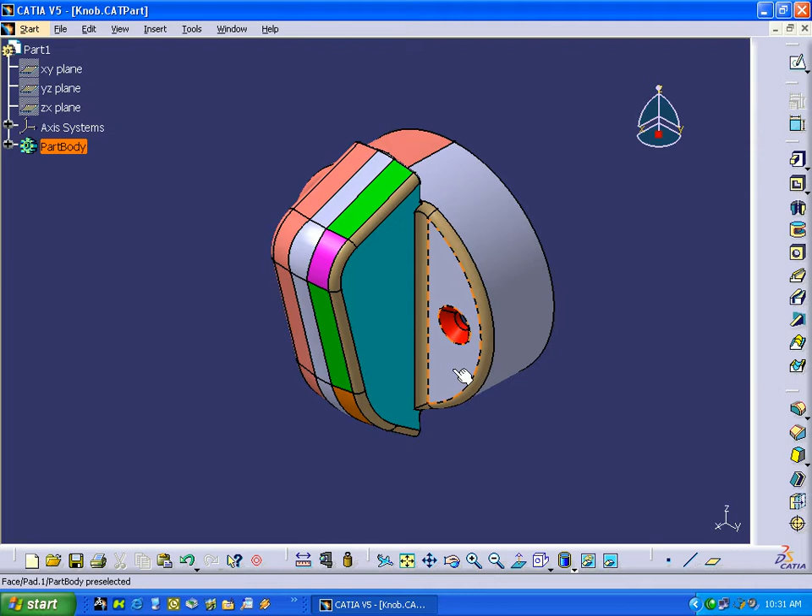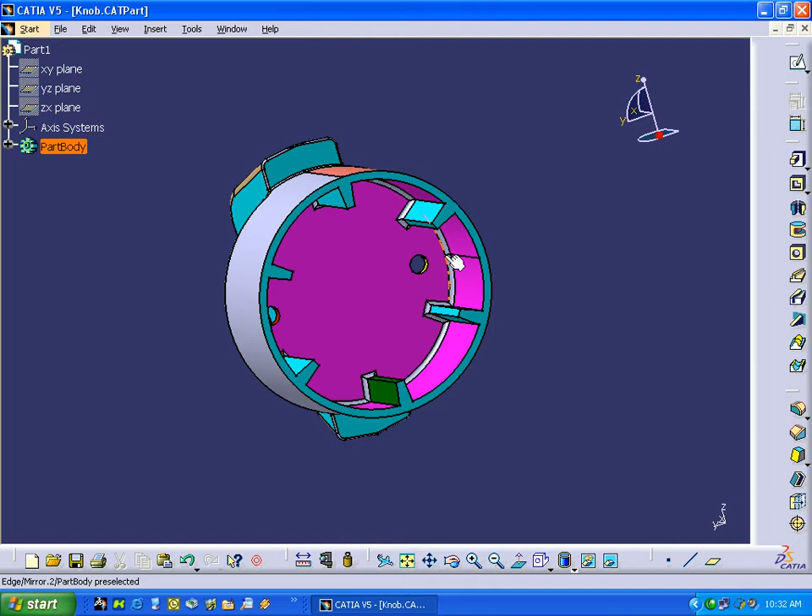I'm in the CATIA V5 application, and I want to show you what we're going to make today. We're going to make this little plastic injected knob with some ribs on this inside part. What we'll do is make this little rib first, and then do a circular pattern to rotate that feature around our center axis vector.

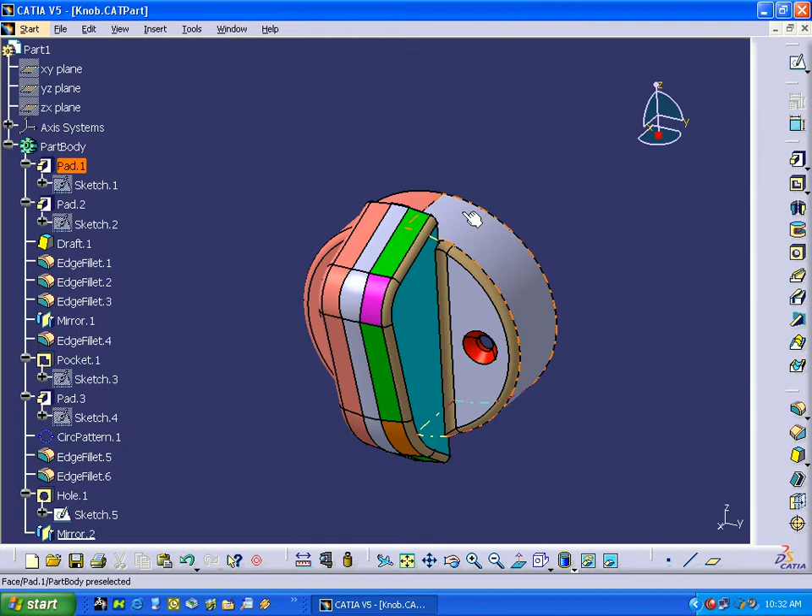I want to talk a little bit about the design intent of how I'll make this, and I'll step you through the steps so you'll see how I make this actual part. So we've got the tree over here, and this pad right here is the pad that we'll make first.

The second pad is this pad, and then we'll create a draft angle of 7 degrees to get a little draft going on there, and then we'll create some fillets, and then we'll come back in the back.

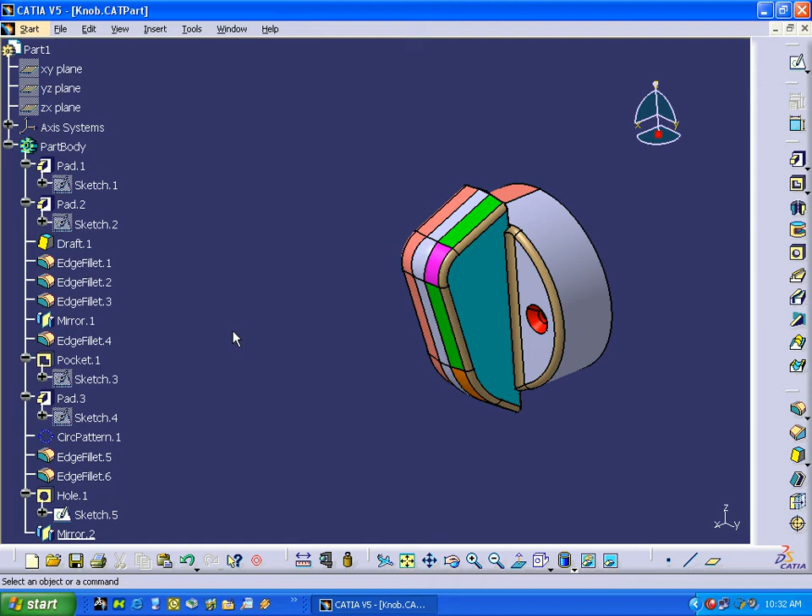Before we do that, we'll do a mirror of this thing, and the idea here is we'll only create half of the part, then mirror the other half over, and we'll create some little edge fillets on this edge up in here and over in here at one time.

Then we'll create a little pocket here, which we'll do as a subtraction of material, and then we'll create this little pad here, and then we'll do a circular pattern, and create a little edge fillet, some edge fillets.

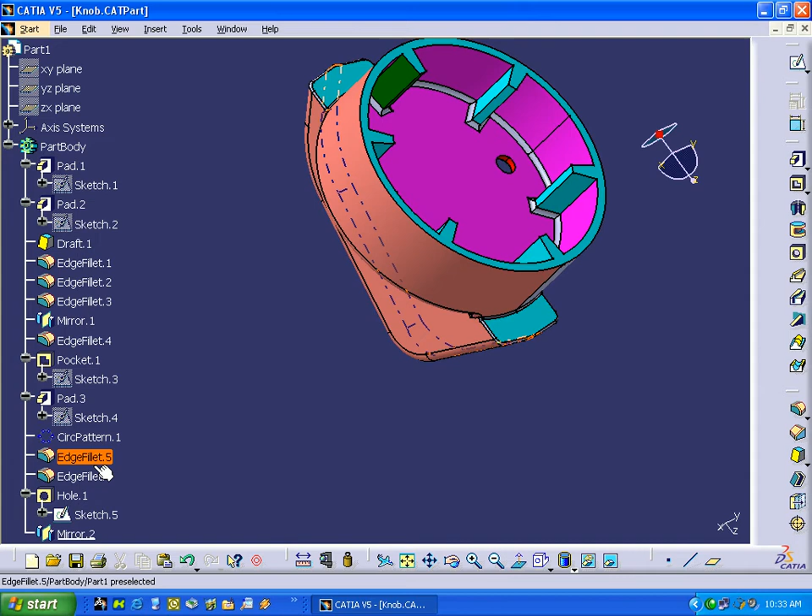On this feature down in here, we'll create a little edge fillet down in here, and then we're going to create a little hole here, and then we'll mirror that hole over to the other side. That'll be the basic steps of what we're going to do to create this little part.

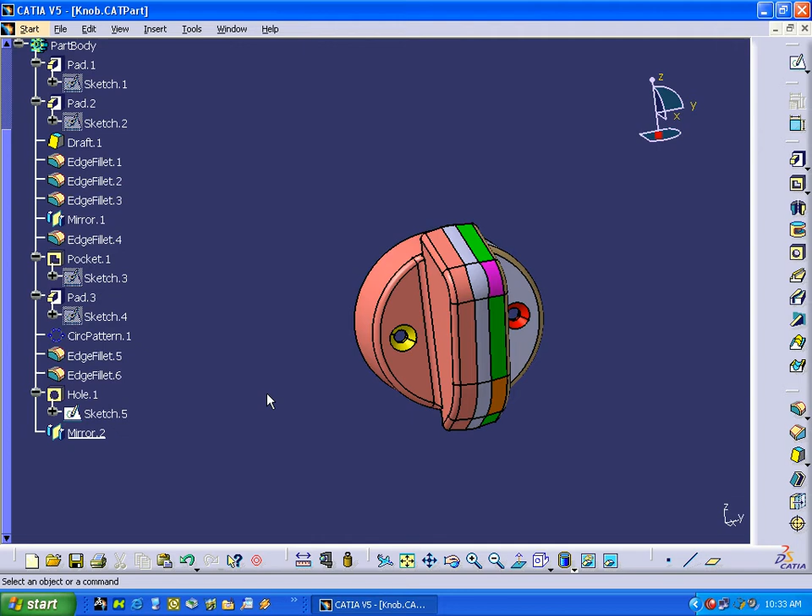So what I'll do now is open up a brand new part file, and I'll show you how I make this part from scratch. I go to Start, New Part, hit OK, and I'll type in New Knob here. Hit OK, and a brand new part pops up.

What we'll do here is no-show these planes because for me it's just busy information, and focus on the orientation. This is our orientation axis, and this axis resides at the intersection of all these planes. For example, we're going to start working on the YZ plane, which is this plane right here.

So if I want to, I can just no-show these, and for me it makes it less busy. Again, start on the YZ plane, and we'll create a sketch. I'll select it, create the sketch icon in the toolbar, and now we're ready to start sketching.

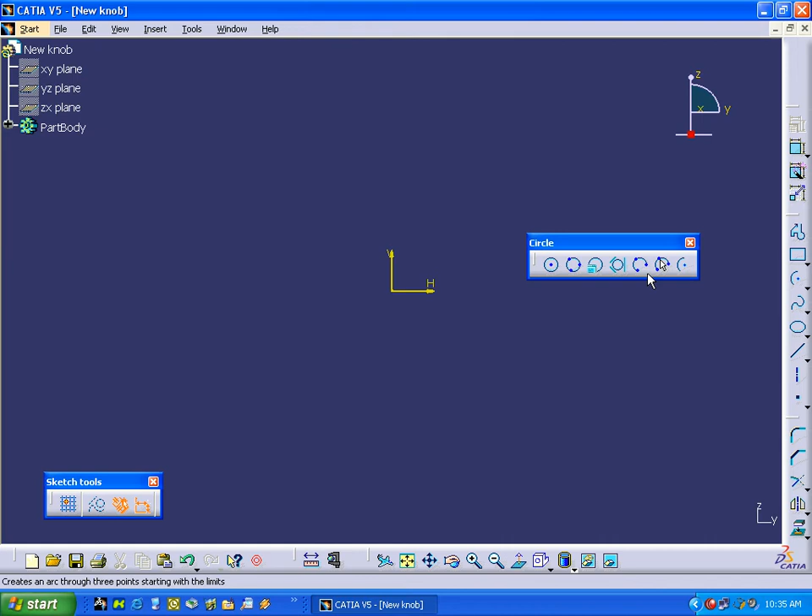So we'll start in this circle toolbar here, and start this thing as an arc. We'll select this, come up here, and create just a half arc here, and hit there. I can minimize this also.

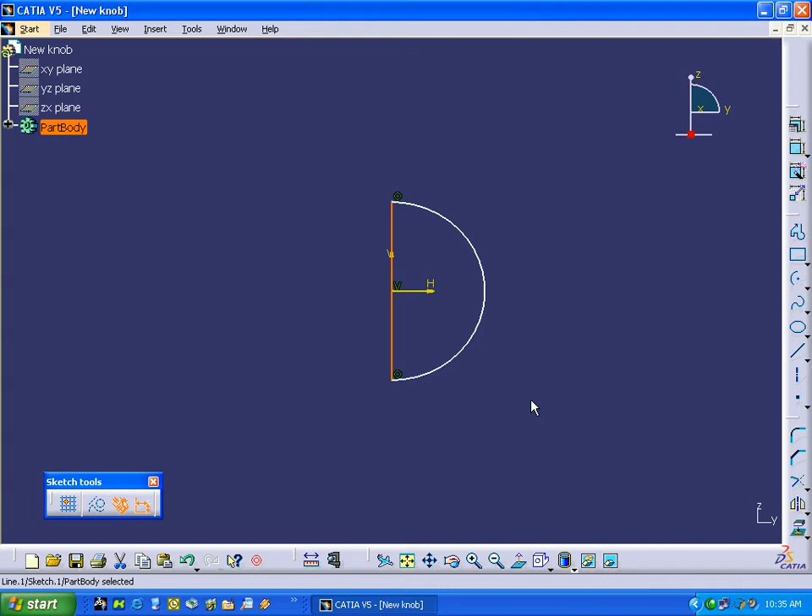Now I'll create a line that will connect the arc ends, and I'll dimension it at 15 millimeters. We'll kind of slide that in, and reframe down here a little bit.

Okay, so now what I've done is I've created a sketch. When the sketch entities are green, that means it's totally defined, and I can exit the sketch and start building a feature here.

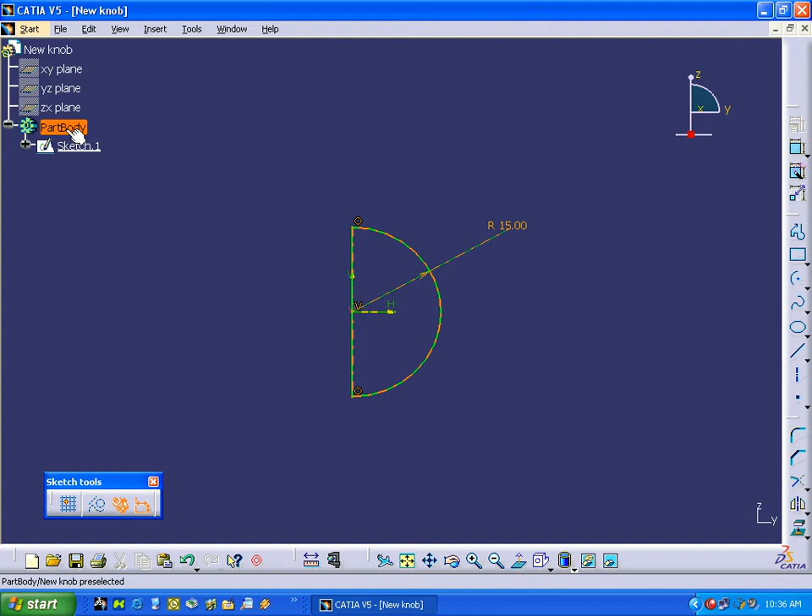There are two ways to exit the sketch. I can exit with the workbench toolbar's exit workbench sketch, or I can just double click on the part body, which also exits the sketch. To minimize the amount of toolbars, I like to just minimize that toolbar and double click on part body. So now we'll use this function and create a pad.

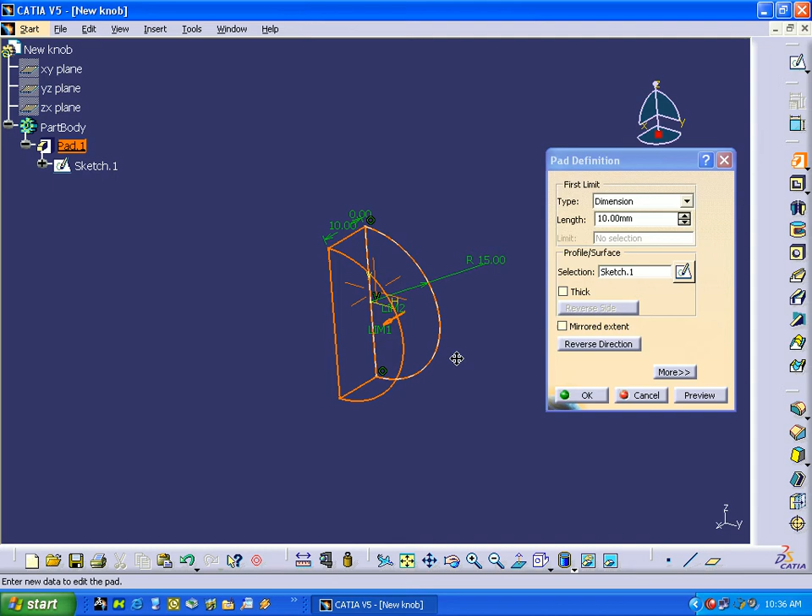I'll select the pad, and we'll create a dimension of 10 millimeters, and we'll select the sketch. Now we're about ready to start building the sketch, and I can hit OK, and we've now built the first solid feature in this part.

So now what we can do is we can create another sketch, and we can continue building. So I'll select this face, and I'll create another sketch.

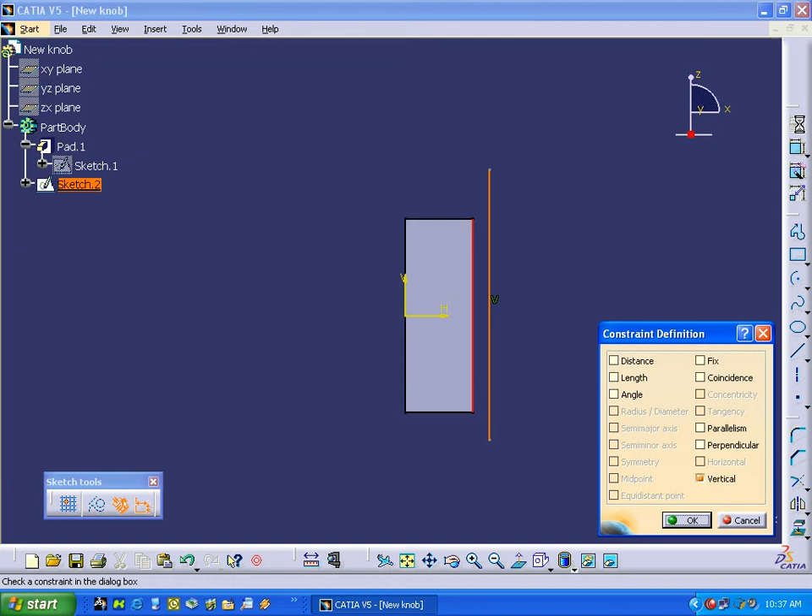How I like to do it is I like to create a line here, which will be vertical, and I'll highlight this and control this, and add a constraint, which is coincidence with there. Now this little toolbar here will give me a normal view, so I can rotate it around if I like, and you can kind of see where I'm working. It's on the back side there, and I can hit this again to get it normal.

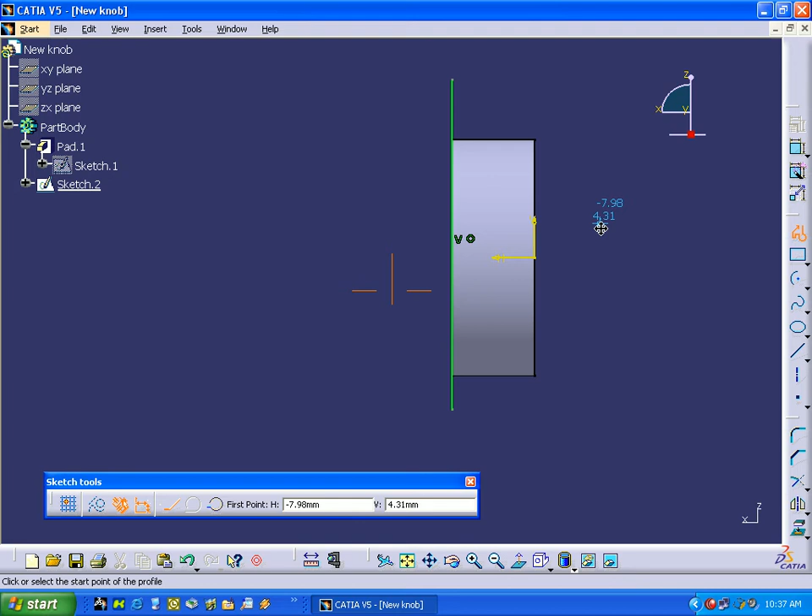So I'll go into this function, which is the profile function. I'll double click it, and I'll zoom that up a little bit, and I'll start building my sketch. I can exit out of that.

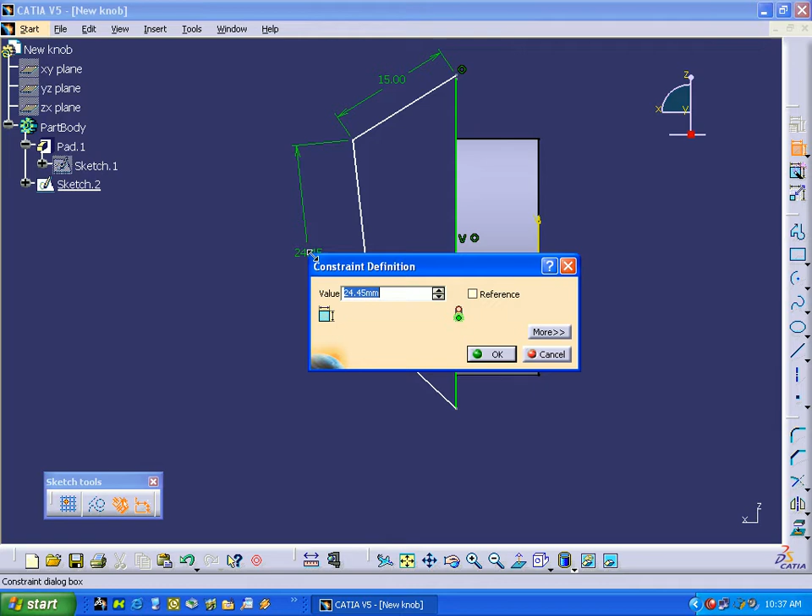Now I can double click on the constraint toolbar, and I can start dimensioning this sketch. We'll dimension that as 15. We'll dimension this as 25. We'll dimension this as 10.

We'll also add dimensions from the axis of 18. Another dimension of 18 here. We're getting close to getting this part totally defined.

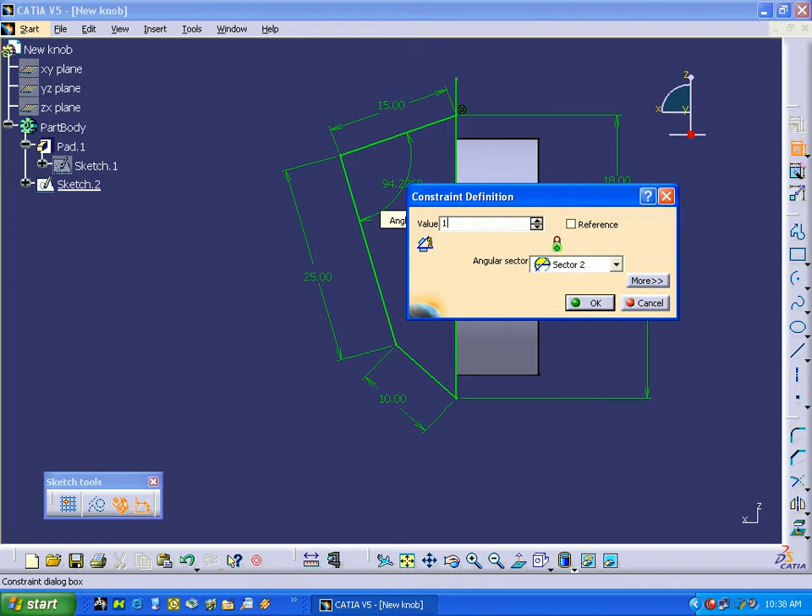As you can see, it's still white, so it needs more dimensions. We can try to add an angular dimension here and see if we get green. We do. So green again means the sketch is totally constrained, and you can kind of see where we're sketching here. It's on this plane right in here.

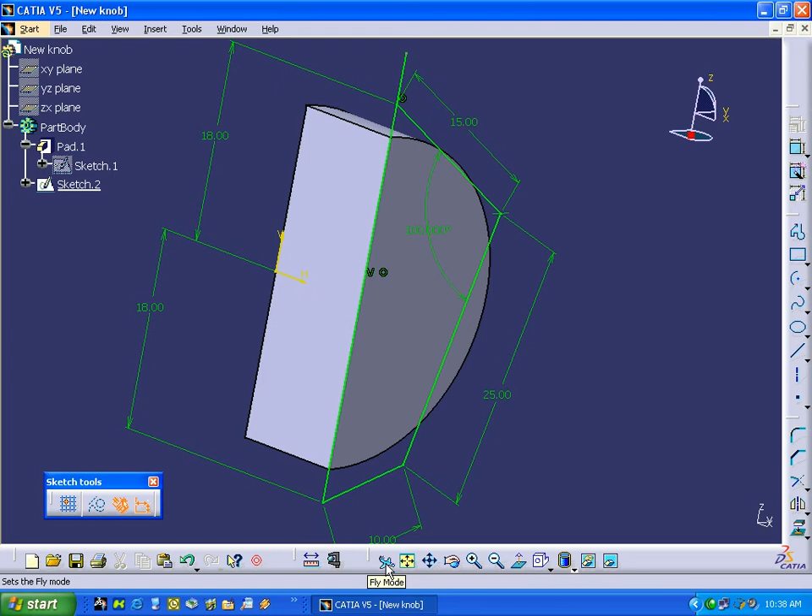And so now we can exit out of our constraint. We can double click on part design, and we've created another sketch to drive a feature. And this is the sketch right here we just created.

Ooh, it looks like we've got a little extension line here, so I can go back in and clean that up. Okay, we'll go back into the sketch, and incidentally, if you want to check and see if a sketch is ready to drive a feature, you can go to Tools, Sketch Analysis, and it says it's opened, and that gives you a warning. So it's telling you that it's not going to drive a feature until this is closed.

So we can close this here, and we can go down into our Trim toolbar, and we can select that. We can select this. It's giving us a little error message, so we can try to delete a dimension and go back and do a trim function.

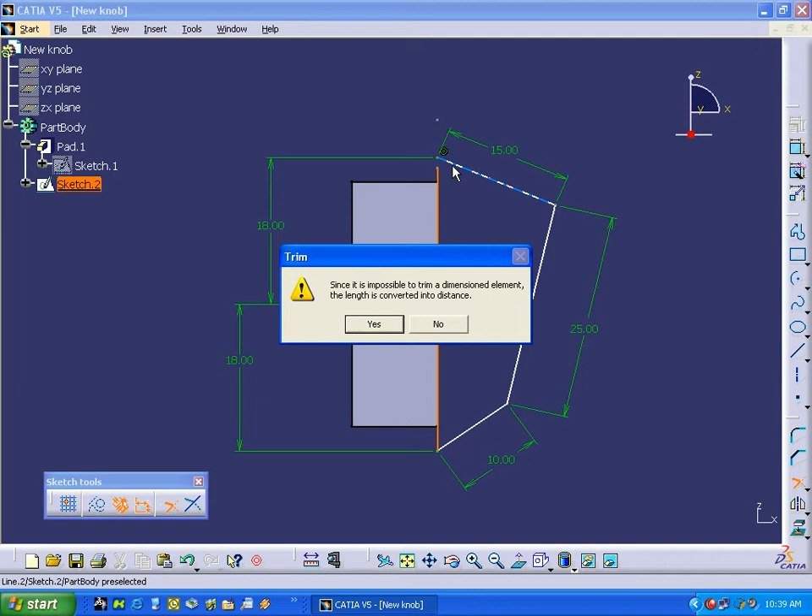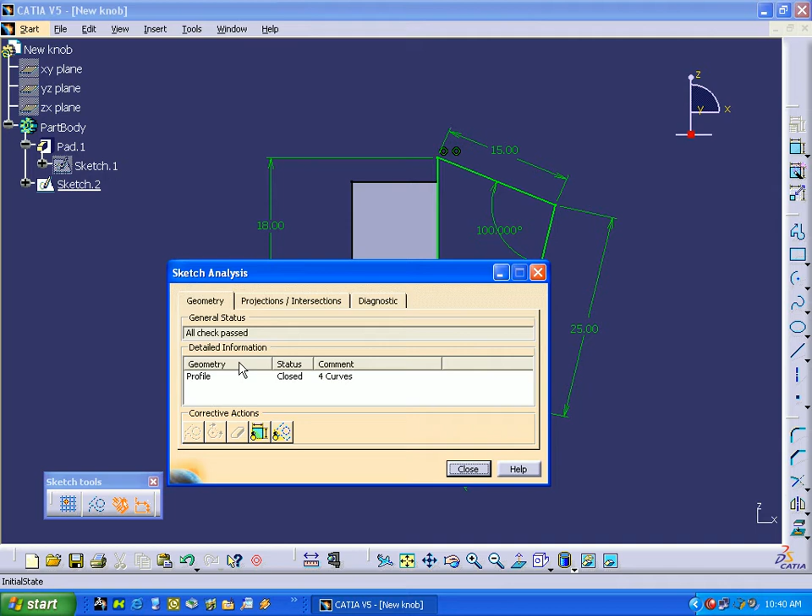Now let's see if this thing is totally closed. So we're going to go to Sketch Analysis, and it is closed, so it will drive a feature. So we can go back to isometric.

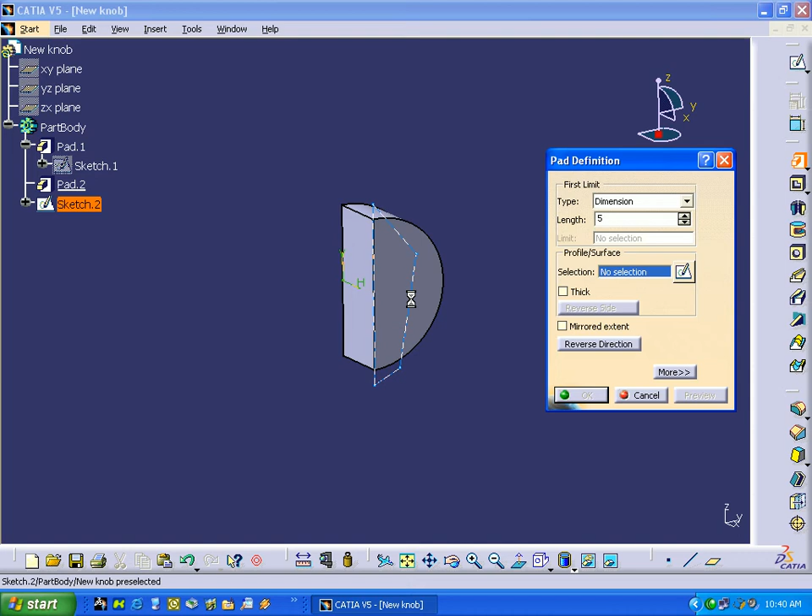We can double click on part design, and we can build this feature. Pad it. We'll go over 5. We'll select the profile. And in this case, we need to reverse the direction because it's going in the wrong direction that we want to go. We can hit OK, and we've just built that feature in the tree.

If you like, we can go back and color these features so you can kind of identify them with a color. Hit OK. So the orange color represents this pad here.

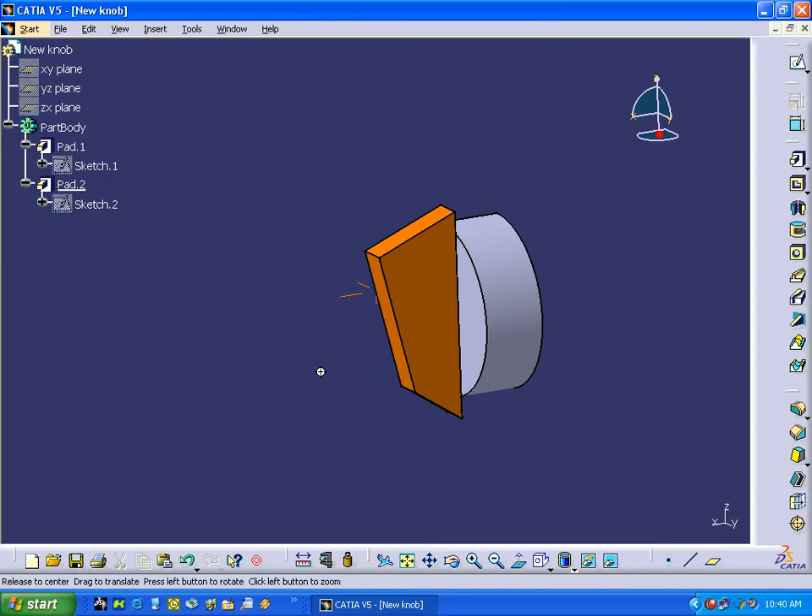Now what we're going to do is we're going to create, like I said, the draft function. We're going to use the draft function to draft this surface, and this surface. Actually, those faces. So what we'll do is we'll go down here into the draft function, and it's asking for an angle. We'll type in 7 degrees, and the faces to draft.

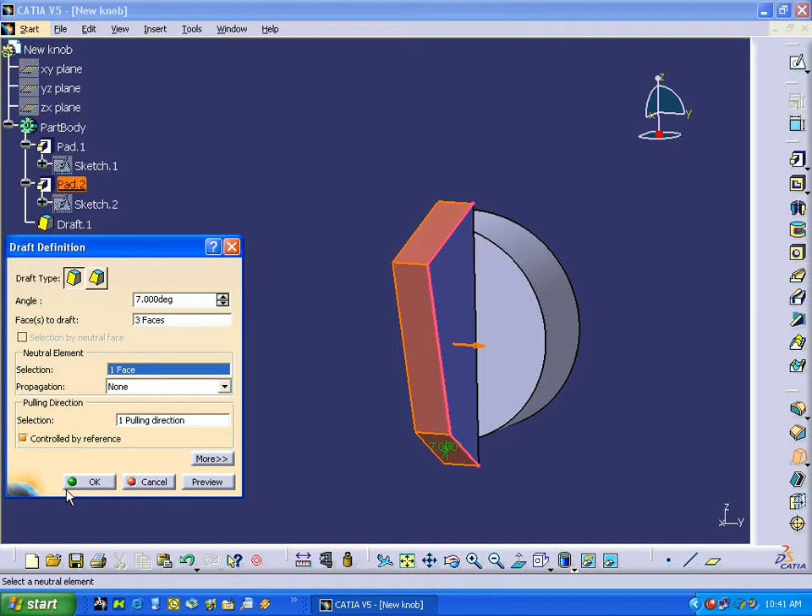We'll select the faces, and then it's going to ask for a neutral element, and everything looks okay, 7 degrees. We'll see if it'll drive it, and it did. Now what we can do is we can go over here and we can see if it is in fact drafted, and there is. It does look like there is about a 7-degree angle on there.

Again, if you like to add color to that draft, you can go into Properties, and you can color that draft.

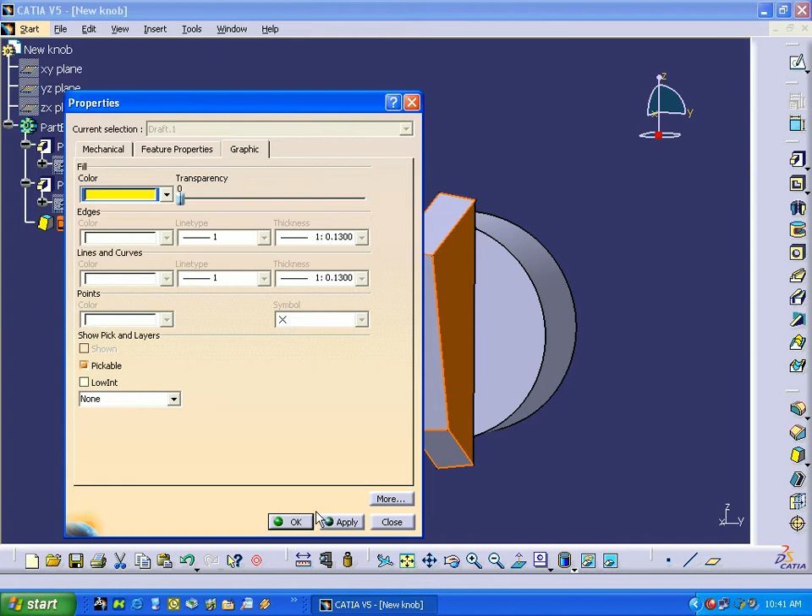Also, you can color things by right-clicking over here and going to Graphics Properties, selecting the item, and coloring it with Graphics Properties. Usually in these applications there's more than one way to do things.

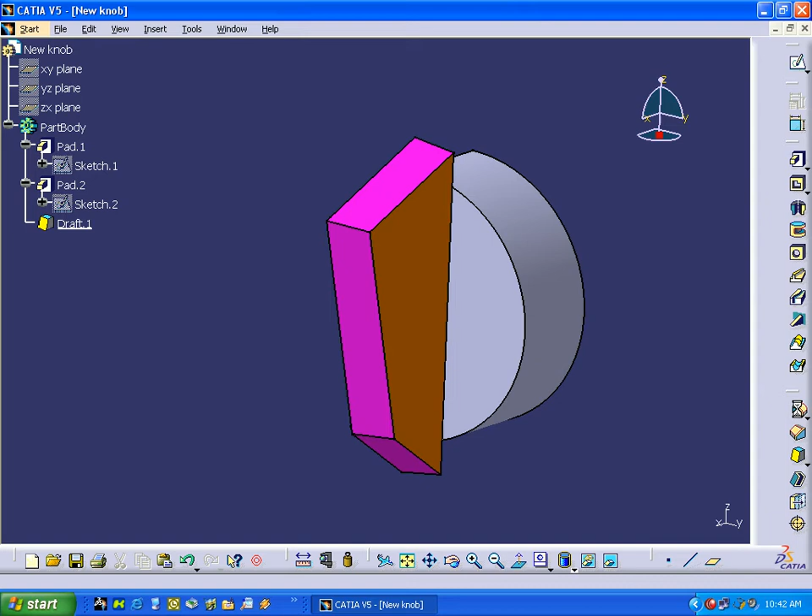So now what we're ready to do is create some fillets to make this part a little more pleasant. We'll use the edge fillet toolbar, double click, select this, and key in a radius of 18 millimeters. Then we'll create another fillet of 5 millimeters up in here. Hit OK, then cancel out of that.

And if you like, we can color those fillets. Hit OK. Properties, color that fillet, hit OK. So you can see what we got - that edge fillet is the one we just made. The one before that was this in here.

Now I'm going to fillet this edge here with a 1 millimeter fillet, and this line down in here with a 1 millimeter fillet, and this edge right here with 1 millimeter, and I'll do it all at one time. So we'll type in 1 millimeter for objects to fillet. We'll select up in here, and it'll drive - the software is smart enough to drive along this whole curve.

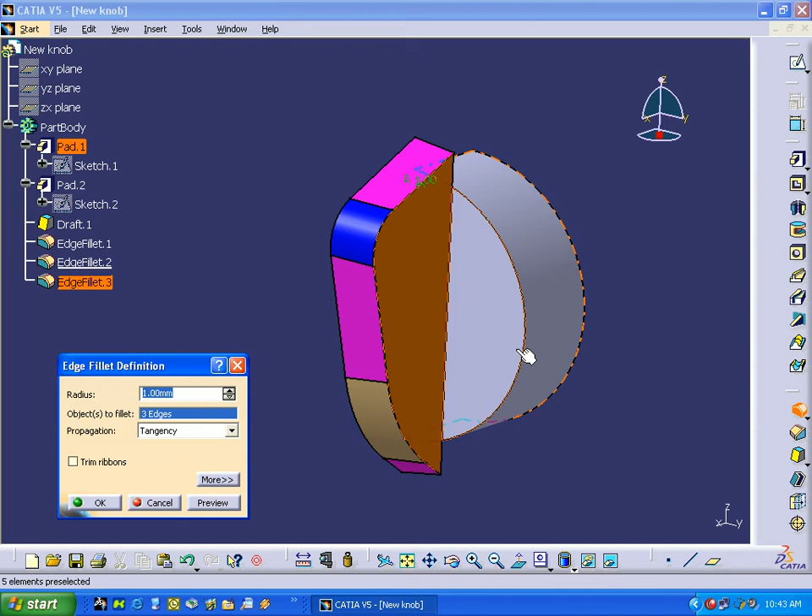We'll also select this, it'll drive along this curve, and we'll drive along this curve. We'll hit OK and see if we drove it. OK, so we've now created that one fillet of 1 millimeter in basically 3 locations. We can cancel out of that, and if you like, we can color that yellow.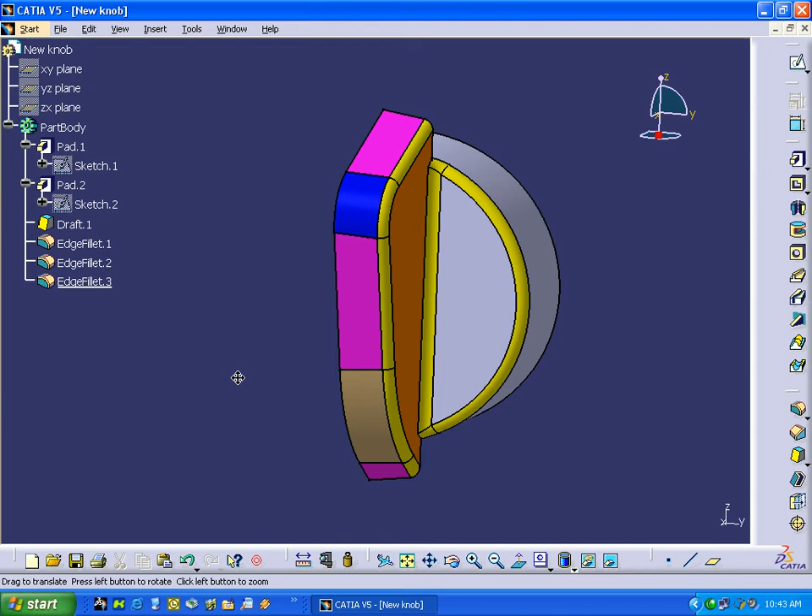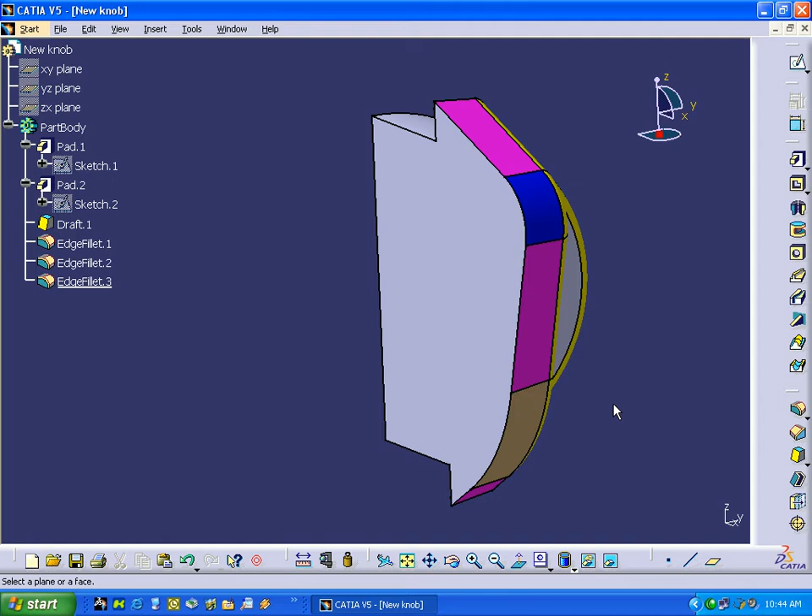OK, so now we've created basically half of this plastic turn knob. What I'm going to do right now is create the other half with a pretty slick little function called mirror. You can either get the mirror function through right-click and transformation features, which is mirror, or you can get it up in here with tools or insert transformation features mirror.

I generally like to access it here because it doesn't require me to bring another toolbar open which I have to close. So what it's asking is down in here, select a plane or face. We'll go ahead and do that, and it's smart enough to know that we want to mirror the whole current solid. So we hit OK, and we've just mirrored the solids that we've created over onto the other side.

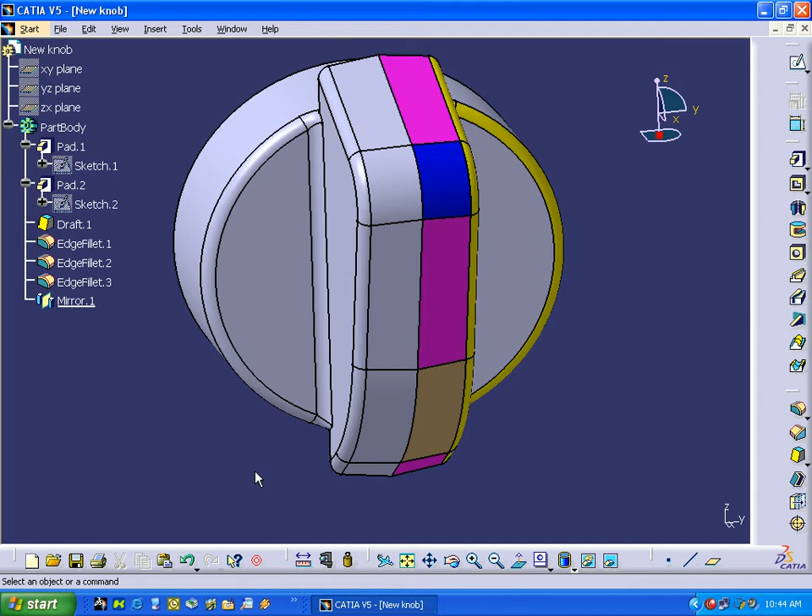Now what I'd like to do is create another fillet down this edge here to make the part a little bit more pleasant. We'll create a 10 millimeter fillet along that edge. We'll select it, and it's smart enough to know that it wants to go down to this point here. We'll hit OK and see what we get.

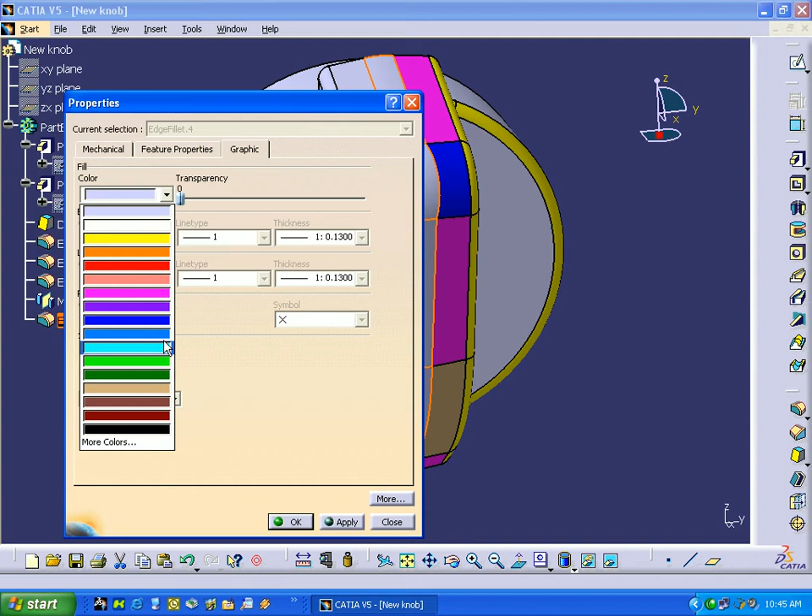We can color that to get a little bit better graphic representation of that item. Hit OK. Now we've got this part looking pretty much like the knob that we want to build. Go back and select the isometric view and get it into a nice position.

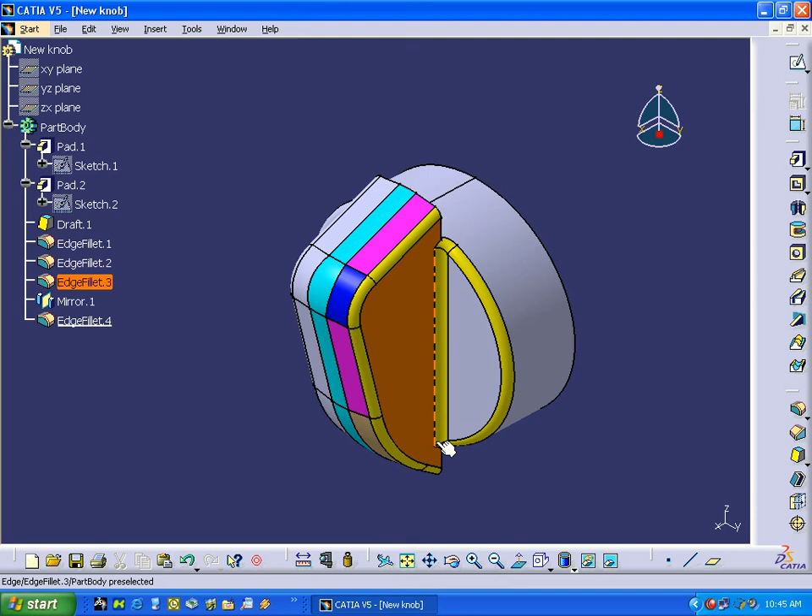Okay, so now what we've got to do is create a recess back in here, and we're going to add some little flanges on that recess. To do that, I can left click on here and create a sketch on that surface, create some geometry, and then take out some material. So I'll go into the circle and select the center point.

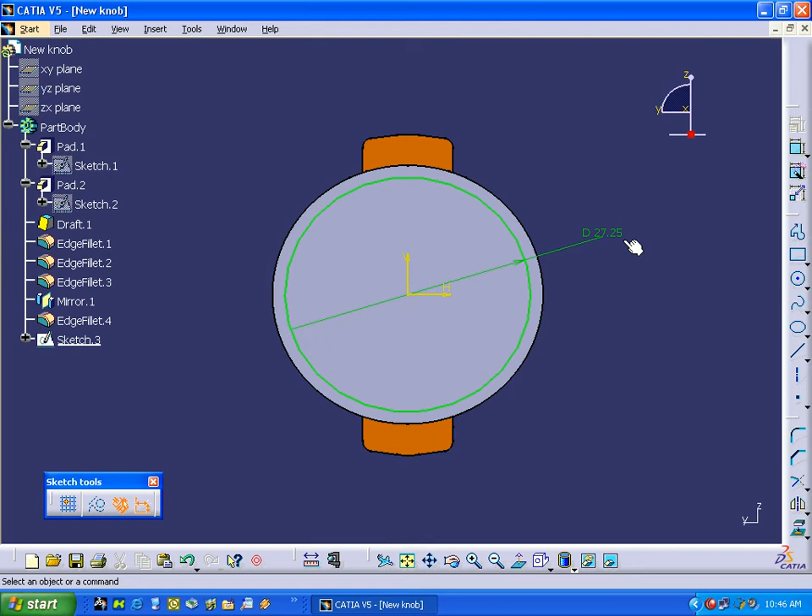I'll drive it out, hit my dimension function, dimension over, and make that dimension diameter 28 millimeters. That leaves 1 millimeter on each side. I can exit the sketch at this point because it's green, and I can use that geometry to drive a pocket. This is the function that we'll use to take out material - it's called a pocket or recess.

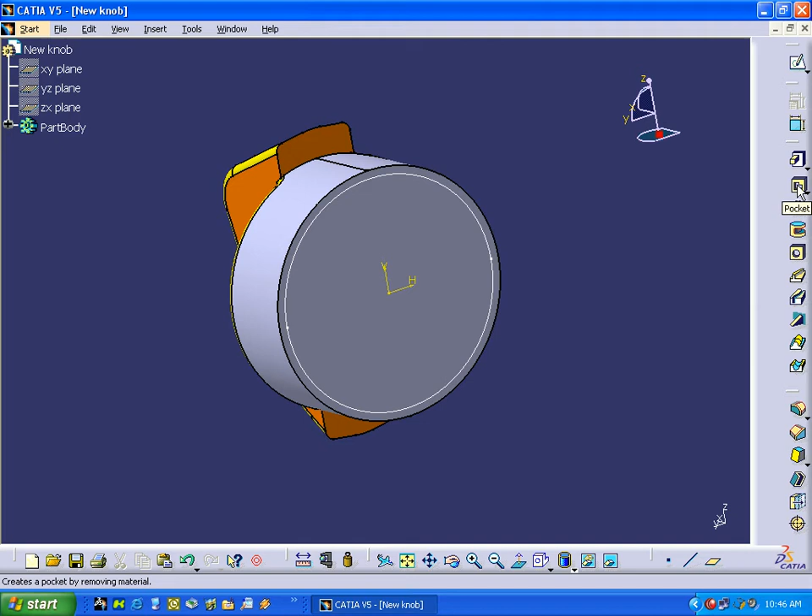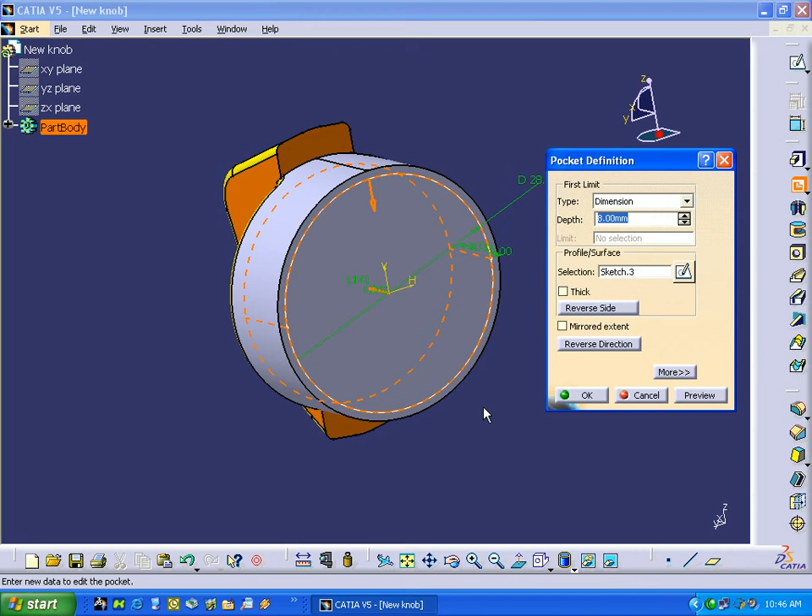So I can select that function, select dimension, which it already is, and then type in a depth of 8 millimeters, and select the sketch to create the pocket. It gives me hidden lines to show me what it's going to do, and you can see that it's about 2 millimeters from this edge here, and that's about how much material I want to leave in the part.

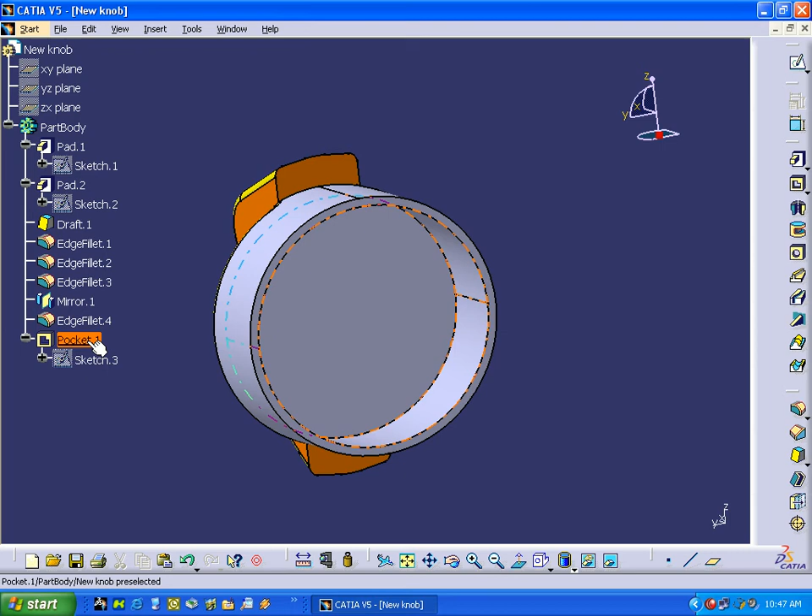I can hit OK, and it just made the pocket. So this pocket right here is the pocket. We can, if you like, color that to make it a little bit more visible. Hit OK. Salmon color represents that pocket.

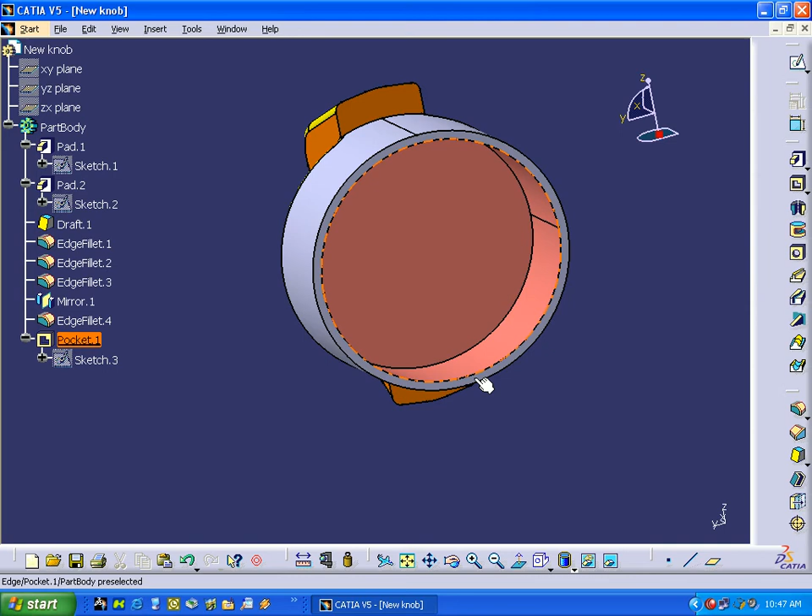Now what we're going to do is create this little rib down in this area here. In order to do that, I've got to create a sketch on this face right in here. So I can select that face, select sketch, and go in here and start making some geometry that I can drive a feature. I'll select on this edge here.

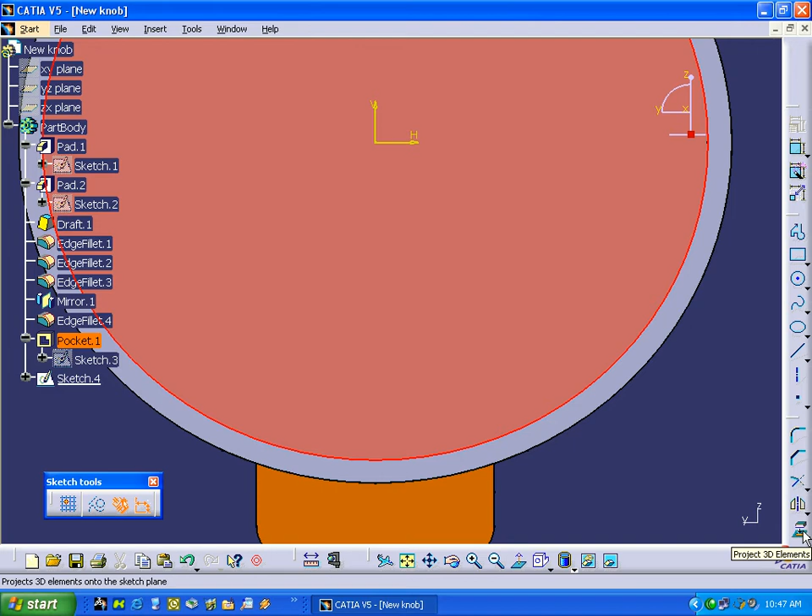I'll go down here to this little tool, which is project 3D elements, and it'll project that line onto that sketch. Now I can create another line element here, and it wants to tie itself to that geometry. I'll make this line symmetrical about this V vector of the axis.

So we'll go select the symmetry tool. It says select the element that you want to make symmetry, and then it's asking for something to make it symmetry of. So we just drove that geometry over on the other side, and these icons are telling you that it is in fact symmetrical.

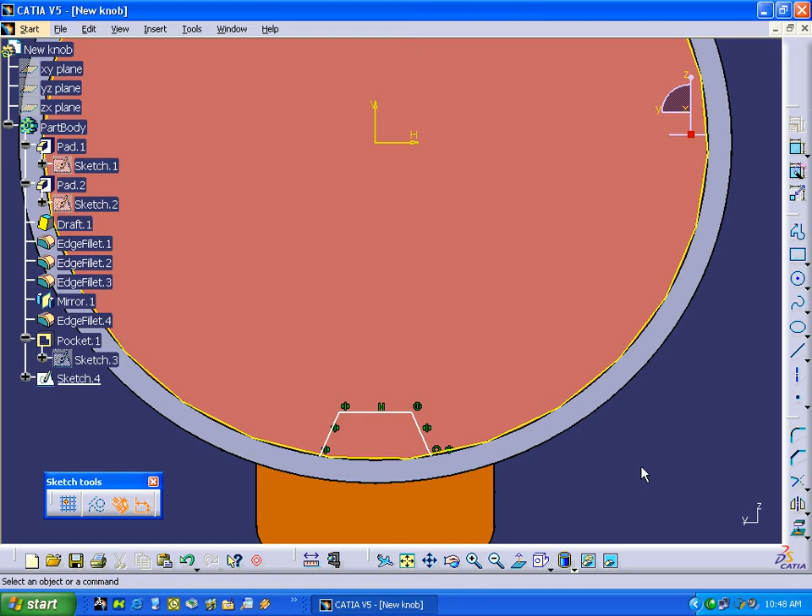Now what I can do is connect the top parts of this sketch with a horizontal line, and I can zoom in on this thing and trim it up a little bit. Trim that element to that element, that element to that element.

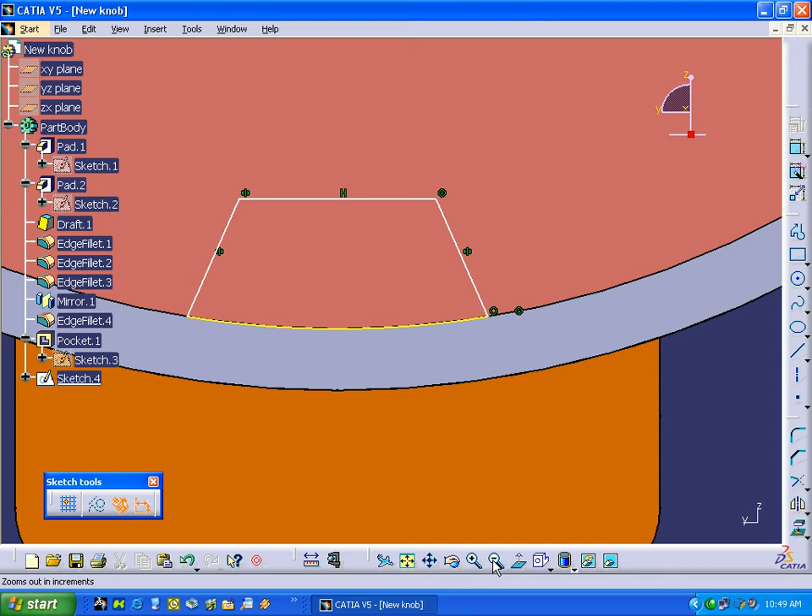Now again, you can go into the tools, sketch analysis, and it's all closed. So I know at this point I can drive geometry. But there's one thing that's basically not done with this sketch, is it's not dimensioned yet. So if I want to dimension this, I can double click there, and I can start dimensioning this sketch.

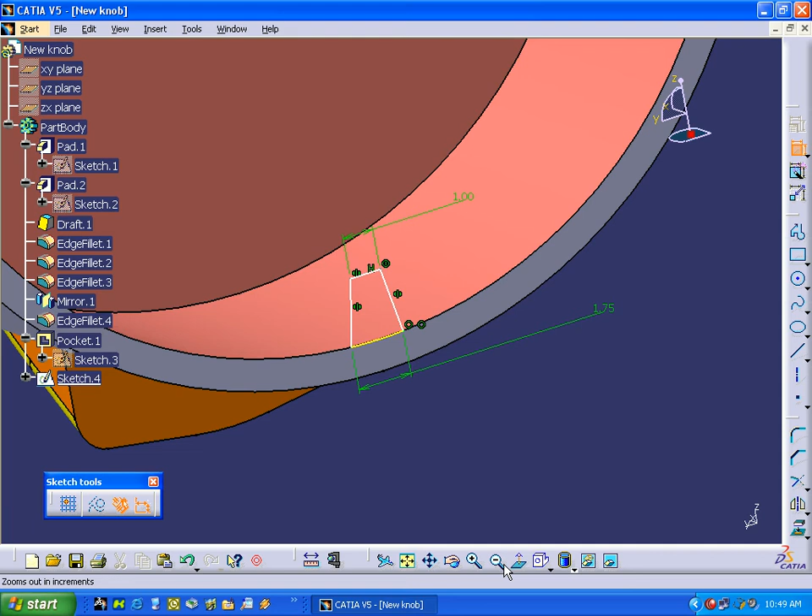So I'll make that at 1 millimeter. I'll dimension this to here at 1.75. Hit OK. Now I've got a dimension. It's still not green, so I've got a dimension off of this vector of the axis to this edge here, and I can make that 12 millimeters.

Now we've got this sketch fully constrained. The green again means fully constrained. The yellow represents information that tells you that edge is now tied to this feature here. So if I change that feature, it will drive with that feature change.

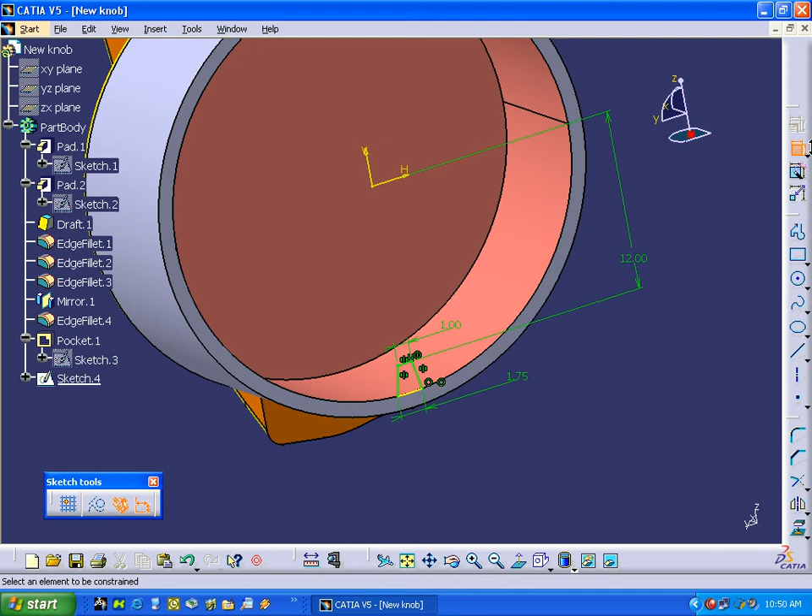So I can also exit the sketch. I'll exit the sketch at this time after I get out of my dimension toolbar, and I can double click on part, and we've created a sketch here that I can drive and create a feature.

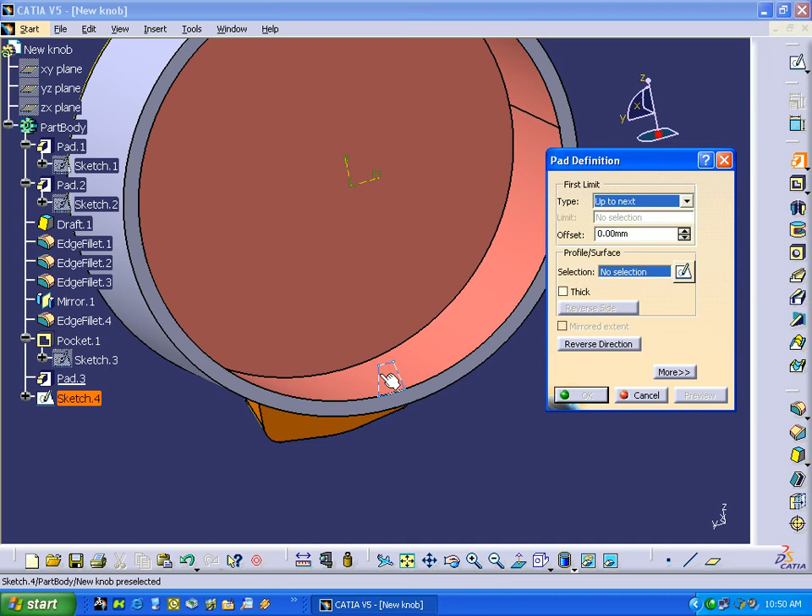So I'll select on pad, and it asks me dimension. I can select up to next, and then I can select the sketch. If for some reason it's not particularly liking that, it might be because it's of the reverse direction, which it was. And now I can hit OK, and I've just created that feature.

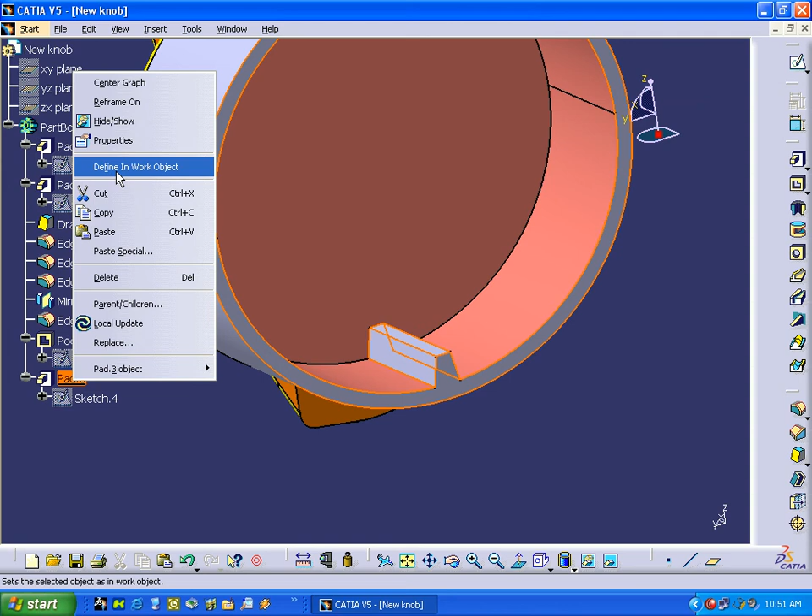So we've just created a feature here, this pad, and I'll go and color that for you so you can kind of see it. We'll make it red. And now what we're going to do, we'll zoom down a little bit, and we'll take that one pad feature and revolve it around a center axis and continue on with the part.

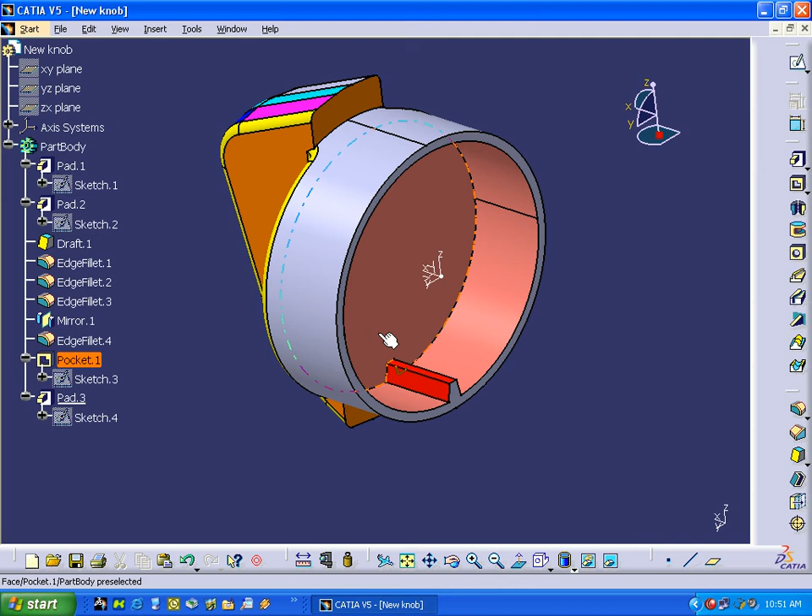So what I need now is an axis to revolve this thing around, and I'll create this axis. Hit OK. I've now created an axis at the orientation of these planes, and it allows me to pick this X vector for the rotation axis.

So now what I can do is go to Tools, or Insert, Transformation Features, Circular Pattern, and I can go in here and select instances and angular spacing. I can type in an angular distance of 60 degrees.

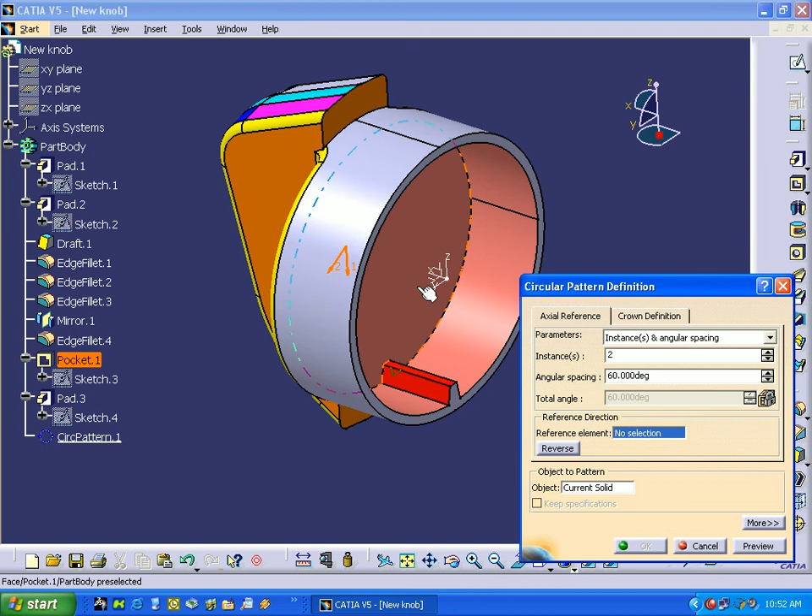It's asking for a reference dimension direction, which is this X vector on the axis, and it's also asking for the item to pattern, and I'll select this pad.

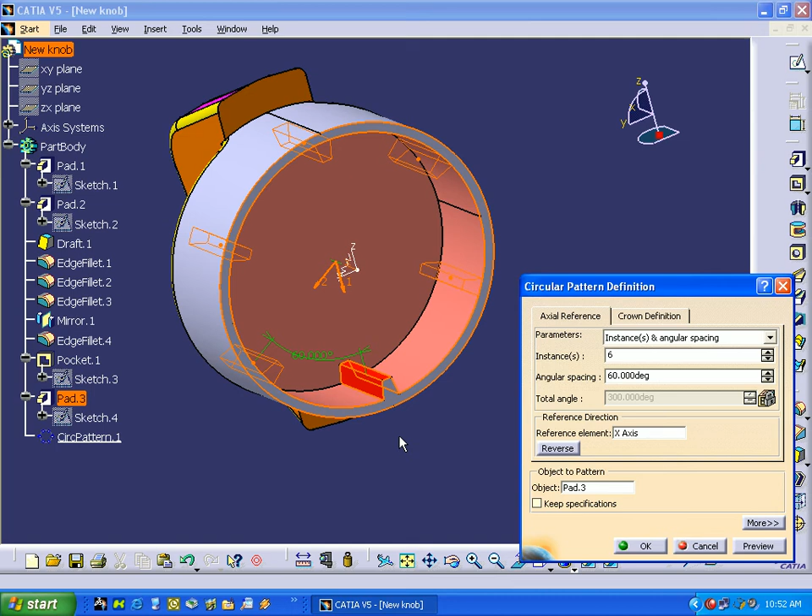So now you can see that I'm creating these instances, two instances of this feature circular pattern, and if I want to up it, you can kind of see as it goes around here that now we'll have six of these features revolved around this X vector. Hit OK, and that circular pattern is now created.

So now it's looking more and more like a part. What I can do is add a little fillet in here, and I can type in 0.5. I can select this bottom face, and it will propagate tangent to that whole face. I select OK, and it's going to drive a little fillet.

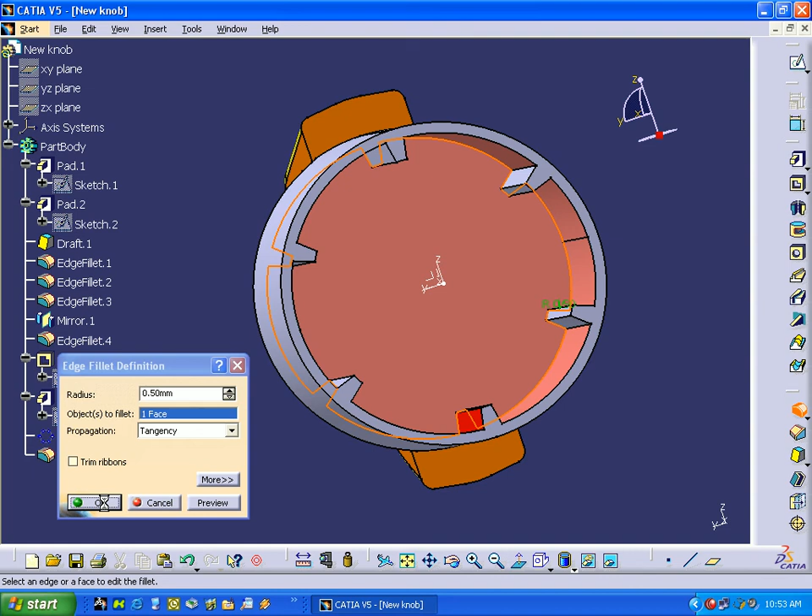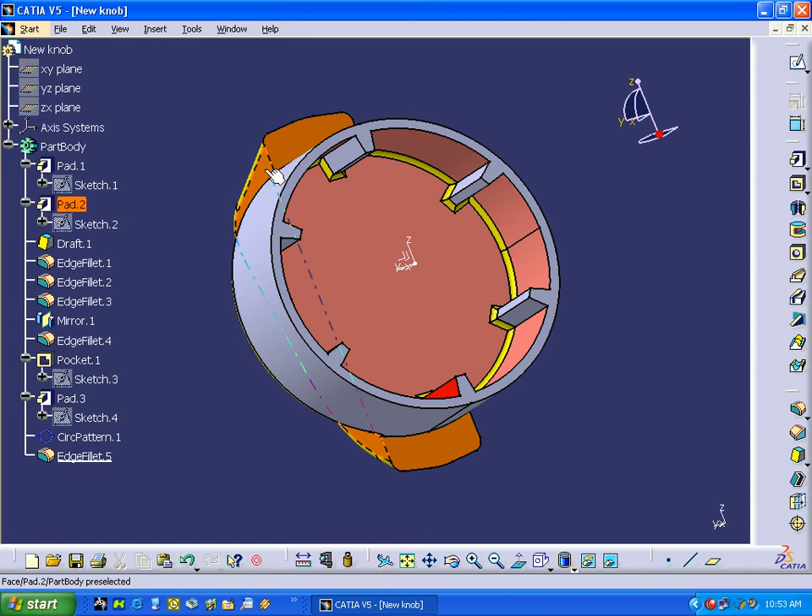As you can see, it drove it. Again, to make it more visible, we can highlight and show that in yellow. Now we've got a couple more things to do to finish this part, and one of them is to add some fillets around this edge here so it's not so sharp. We can do that with the fillet function.

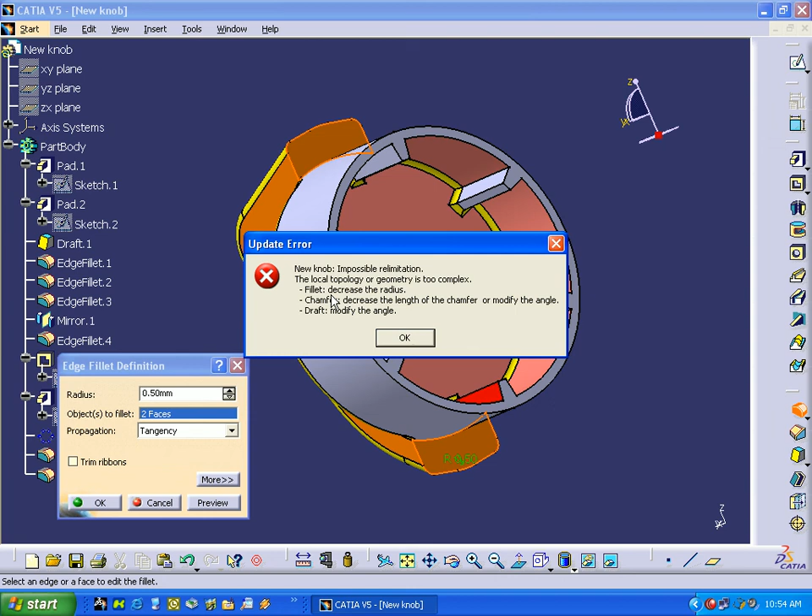I'll double click on it, and we'll try a radius of 0.5 millimeters and see if that'll drive it. You select that face and tangent, hit OK. It gives me an error message saying it failed, basically telling me to decrease the radius if I want this to work. So we'll go back, hit OK, type in 0.3, and see if that'll drive. And it did, in fact. So cancel out of that, and you can see we've made that little fillet.

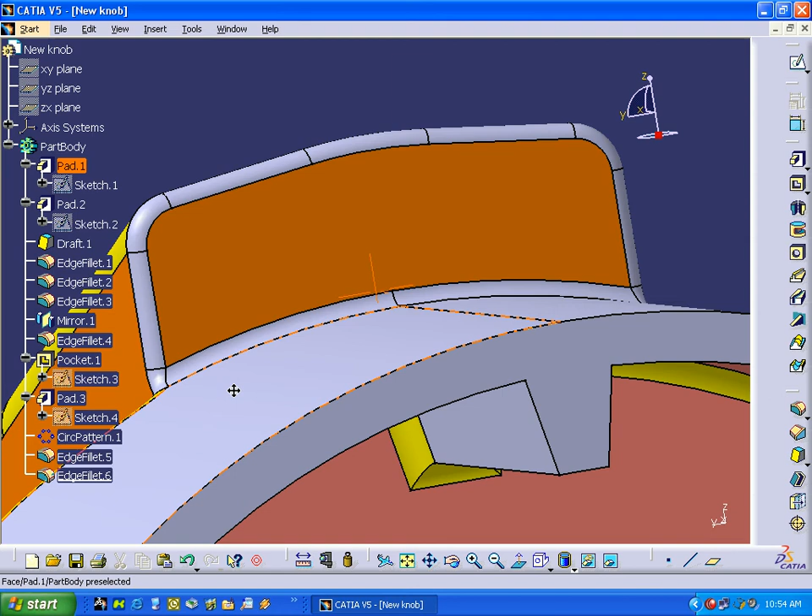Down in here is probably the tricky part where it was having a little bit of a problem. So we can zoom back out.

Now we've got to create a hole over here and do a symmetry. So we'll create a hole with the hole function. We'll select on that, and start driving that hole feature. The type of hole we want is countersunk, and we'll do it with depth and angle.

Our depth will be 1.2 — that's the depth of the countersunk fastener, this depth right here — and our angle will be 90 degrees, the angle of the countersunk of the fastener. We'll go back and type in the extension of our hole diameter, 2.2, and here we'll type in up to next.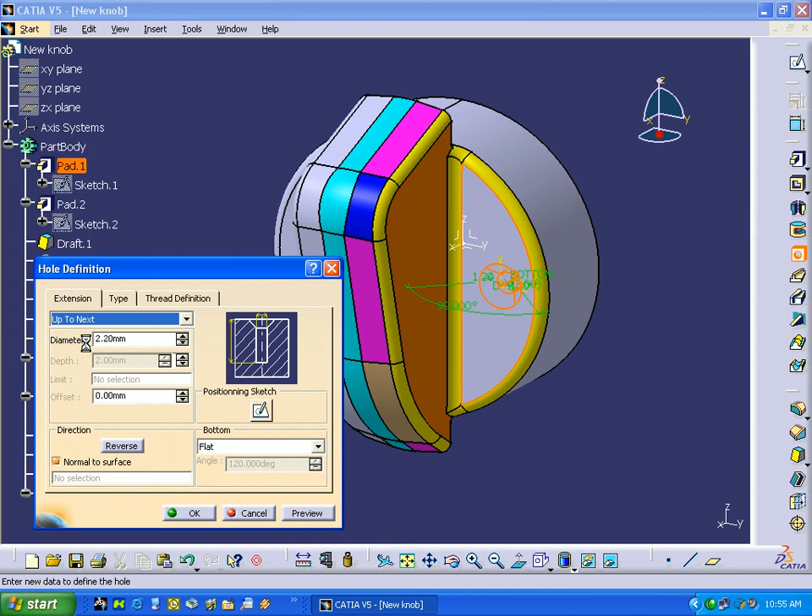We'll select OK. Now we've created that little countersunk hole, but it's probably not in the right location because I just selected a point on this face. So we can go into this sketch and see where that point location is.

Now we can go in and constrain that point location. I can select the point, select that axis right there, and type in a value of 0 — I want it in the center of the part. I can also type in a distance of 10 inches... 10 millimeters, pardon me.

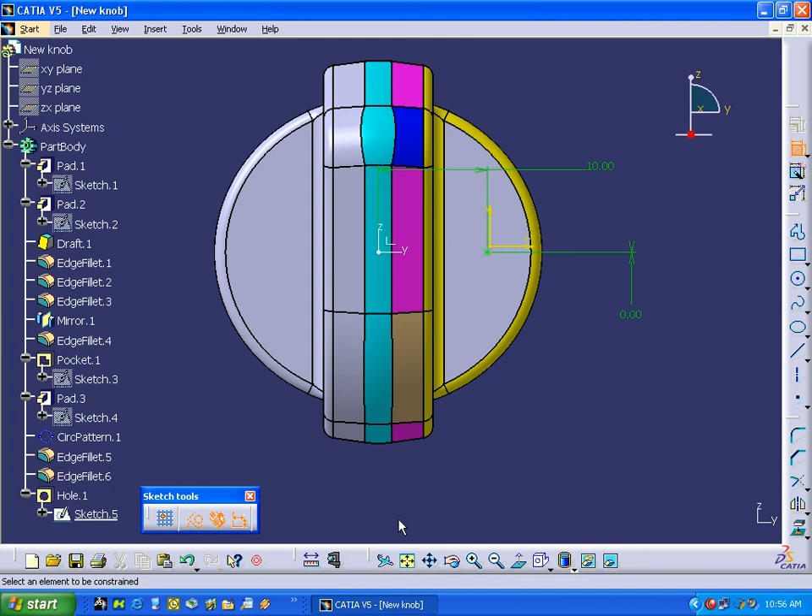So now we can also exit that sketch, click on part body, and we've now created that countersunk hole. We can rotate the part to make sure it's not interfering with any of the ribs we've created.

Now the last thing we have to do is just mirror this feature over onto this side, and we're basically done. So I can select the feature, which is this hole location.

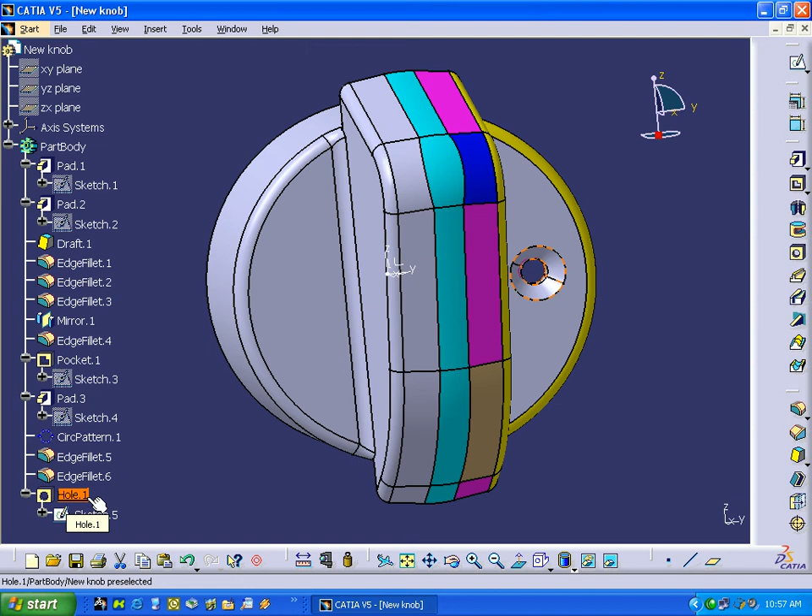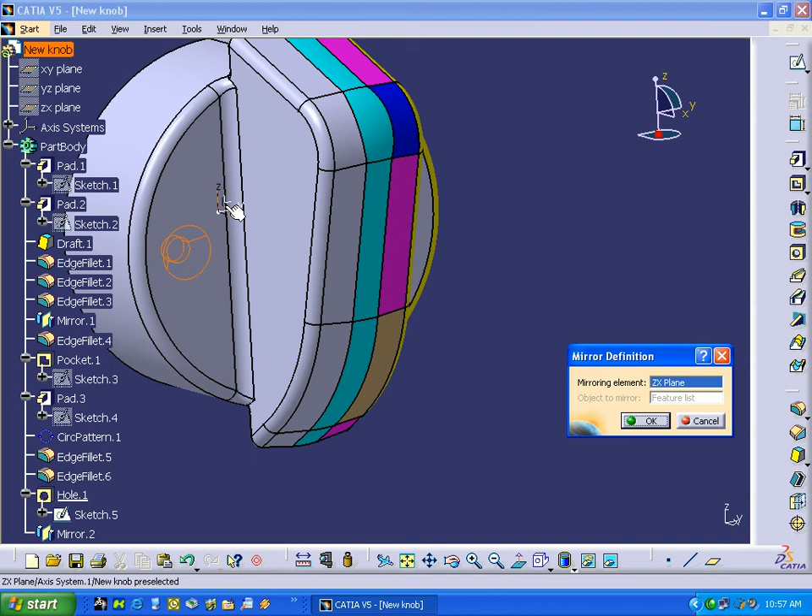I can go to Insert, Transformation Features, Mirror, and select the mirroring element, which will be my ZX plane. I can either select it here or up in the tree — in this case I'll select it right here. Hit OK, and I've now mirrored that feature onto the other side.

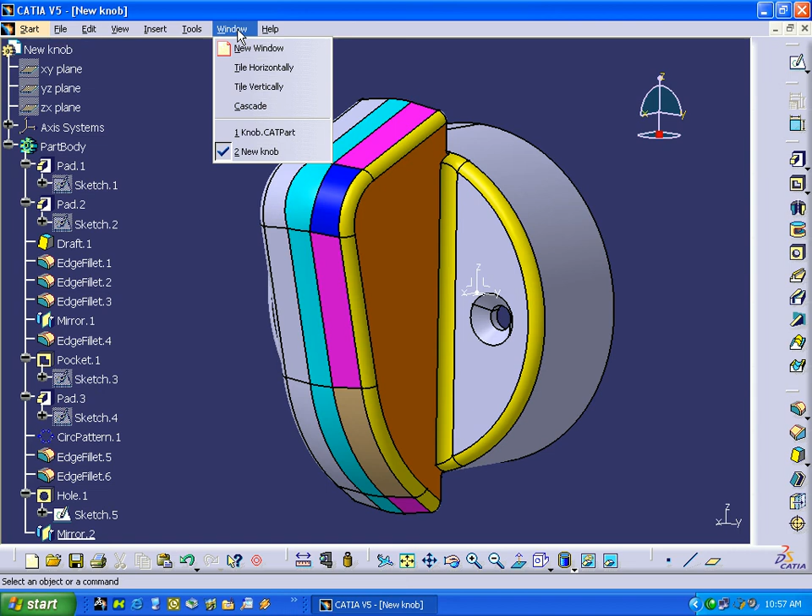So what we've done here is we've created this new part in part design, and we've created a new CATPart file. I'll show you what we've done here — these are the two parts we had open, tiled horizontally. This was our original part, and this is our brand new part here. And that concludes the exercise.